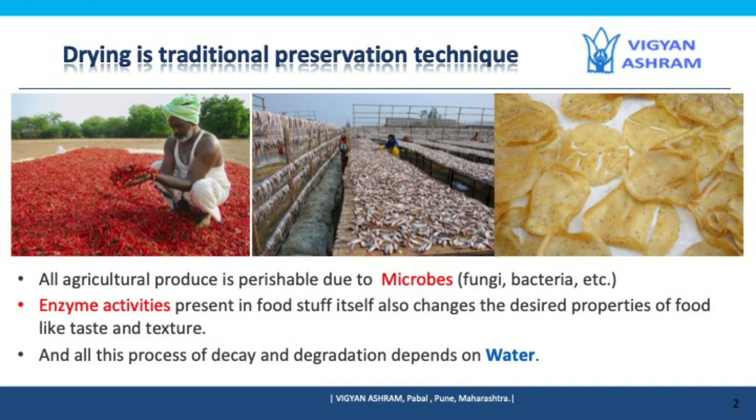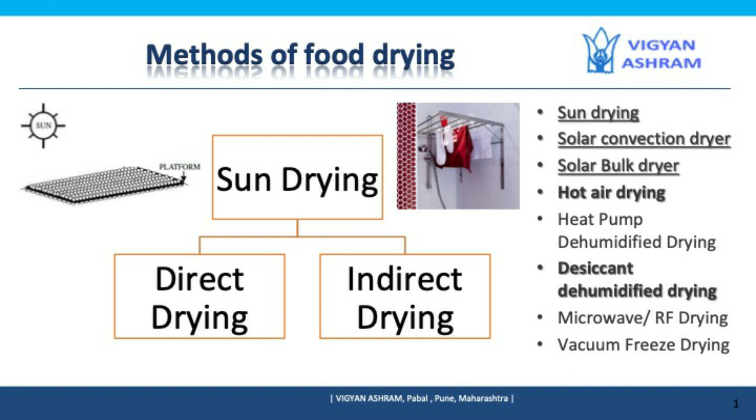And another factor that is again a property of air that we all know is relative humidity. Relative humidity is the capacity of air to take up the water. If the air is humid, it will not take up any water. If the air is pretty much dry, it will take up the water from the product and dry our product. Now these are the factors that are affecting drying process as an evaporation process.

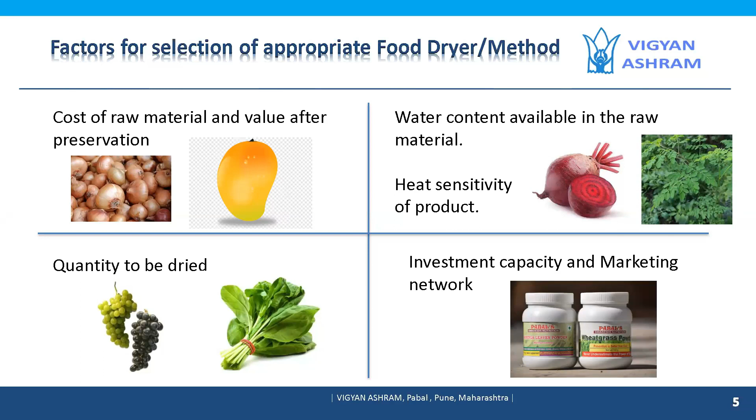So basically, dryers can be classified on the basis of energy that is used, that is, whether solar energy, electrical energy or other biomass fuel is used inside them. Another category is on the basis of mode of operation. There are batch type dryers: you just load the machine and it will continuously process one batch and finish the process, and then you have to load another batch.

And another one is the continuous system, like a type of conveyor belt where you can feed the material from one end and continuously get dry material from the other end. Further, there are some non-conventional methods. The above are the industrial and conventional methods. Non-conventional methods are microwave drying, freeze drying, dehumidifiers, and vacuum drying. All these are non-conventional because these are new technologies, very high in cost, and used in a small amount in the industry.

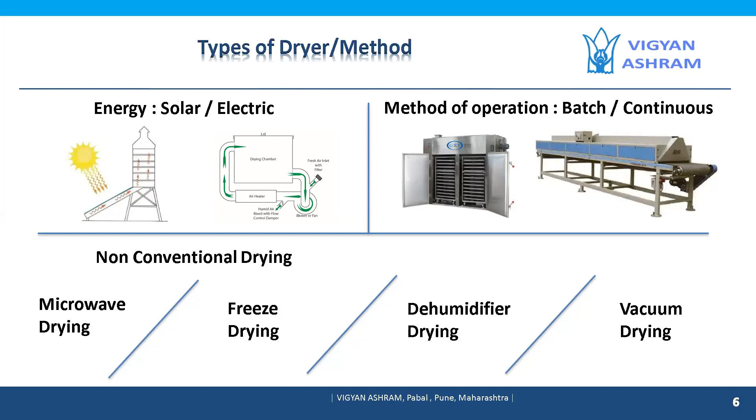Like there is dust present in the air, there are pollution particles present in the air. Also there are some contaminants like germs which can settle on your food product during the process of sun drying. It is very easy to do it: you spread a sheet, spread the product on it, and it will dry when exposed to the sun. Also it is very time-bound, like you can dry things only during the daytime. There is no control over the process.

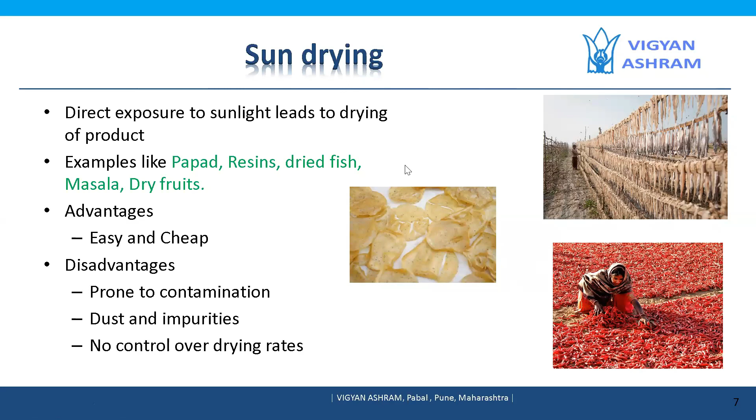Solar dryer is an indirect method of drying, where the product is not directly exposed to solar energy.

In physics, when air gets hot it moves upwards. So all the hot air moves upwards, and at the outlet there are trays in which we keep our products. This hot air passes through the products, takes away the moisture, and is discharged out. This is how the drying process works.

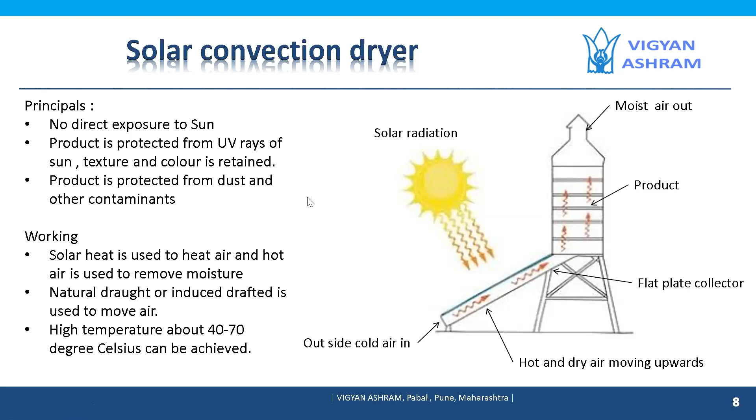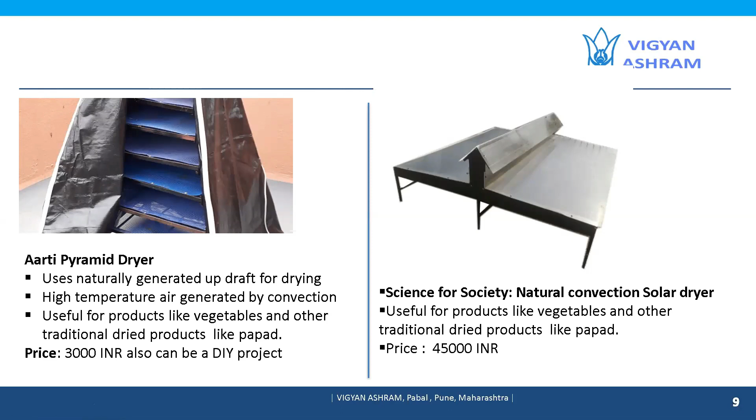It is also a natural convection dryer. The cost is mentioned in the slide at 45,000 INR, with a capacity of almost 5 to 20 kgs. Okay, now tell us about other available dryers, the BRC and the Seed dryer.

Different organizations have developed dryers. BRC has developed a cabinet dryer that uses forced convection, with fans for air movement, and a box inside which trays are kept with the food located on them. It is a low to moderate cost dryer, specifically designed for processed food and vegetables, costing up to 25,000 INR.

Furthermore, Seed Hyderabad has developed and is selling dryers in the market, called SDM 100, with a series of SDM models having an initial investment of 6 lakhs to 15 lakhs. It is suitable for vegetables and domestic goods, meant for bulk quantity, and again a forced convection dryer using fans for airflow and solar energy for heating.

In Seed dryers you can dry more than 50 kg and above, in bulk quantity like 50 kg, 100 kg, 500 kg. So they are commercial kind of dryers, and you can make very good mango bars using this kind of bulk quantity dryer.

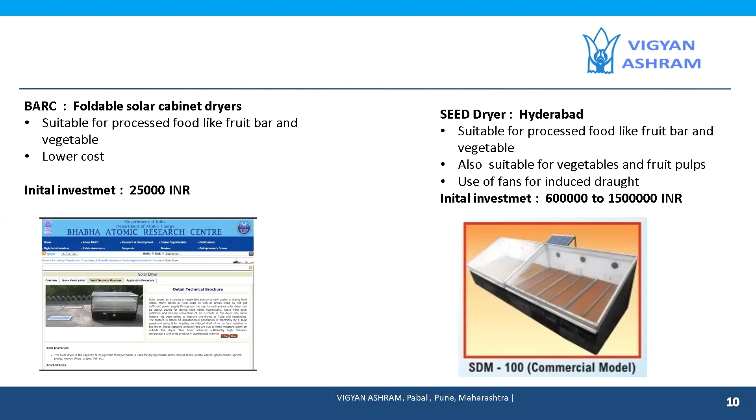Tunnel dryer is the very classic type of dryer where you erect a polyhouse-like structure, but it is closed, and there are fans which exhaust hot air. Due to the polythene paper, all the heat stays inside, and the product is not exposed to outside air. The inside temperature rises, and the exhaust air is driven out by the fan. This is for large quantity drying, like fruits and masalas.

In South India, there are many tunnel dryers used for drying masalas like turmeric, chili, and black pepper, kind of very essential oil stuff. It is used for very bulk quantities, like 100 kgs, 200 kgs of product at one time.

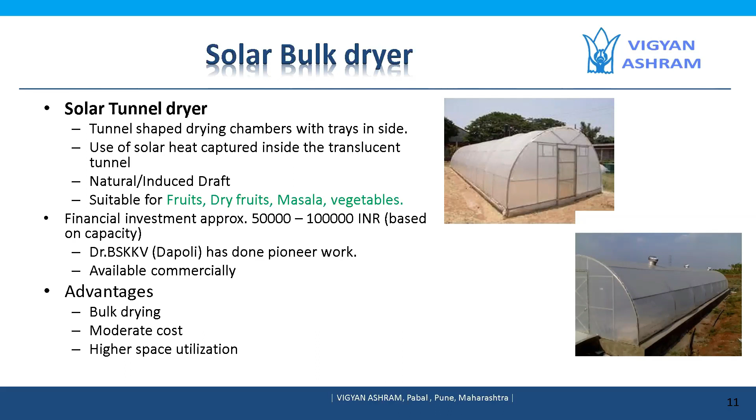Okay, very good, Shubham, now next question. Actually I haven't introduced the participant properly. Shubham is the one who made the dome dryer at Vigyan Ashram. So Shubham, tell us about your dryer, how you designed it, and what are the features of the dryer.

I am a student from Design Innovation Center at Vigyan Ashram, and this was my project for 3 years. The major aim was to increase the bulk capacity of the dryer and also reduce the cost, so it should be affordable for rural farmers to invest in the drying process.

So basically we optimized the shape of the dryer. We studied all possible shapes like dome, prism, cube, and we zeroed down on the dome because it has the highest surface area - minimum surface area for given volume, and for given surface it has the highest volume. The basic problem in solar dryers, cabinet dryers, or solar bulk dryers was sun tracking.

As the day passes, the sun moves, and the heat capture was reduced with the angle of the sun. But the dome shape helps us capture sunlight from all directions, irrespective of position.

Inside there are trays on which the product is kept, as you can see in the image. Then the dome is kept on the product as a lid, and there is a fan on top of the dome powered by solar panels, which draws hot air outside. The principle is the same, we have just optimized the shape to increase the capacity of the dryer.

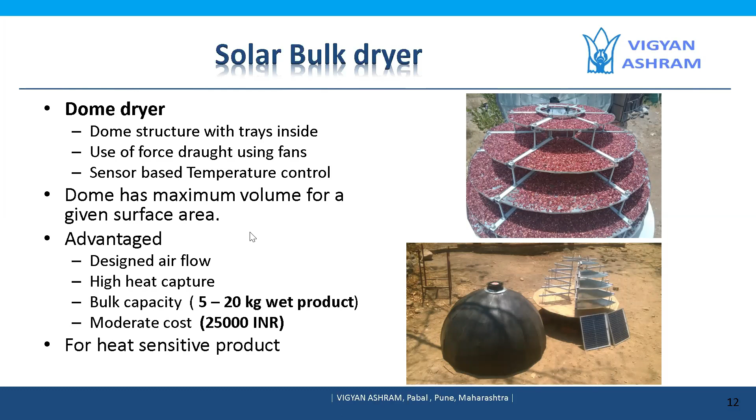Now I want to introduce you to my other colleague, Pramod. Pramod, are you there? Pramod? Yes sir, I think - okay, had some connectivity issue. Okay good.

So Ranjit, tell me about what kind of products Pramod makes. Hi everyone, this is Ranjit, and I know Pramod Pansare from the last 8 years. He is our incubatee at Vigyan Ashram, and Pramod runs his food processing business called Srinath Food Products at Pabal, and he has pioneered some very innovative products.

He makes moringa powder fortified chikki, biscuits, he also sells moringa powder, and he has got some interesting ready mixes, like puran mix. Puran poli is quite famous in Maharashtra, and making the puran stuffing for the roti is a kind of tedious process, so Pramod has pioneered a puran mix, ready mix powder.

Pramod has his processing unit at Pabal, and he's using solar drying in combination with an electrical cabinet dryer. I think his investment is around 5 lakh rupees, sir.

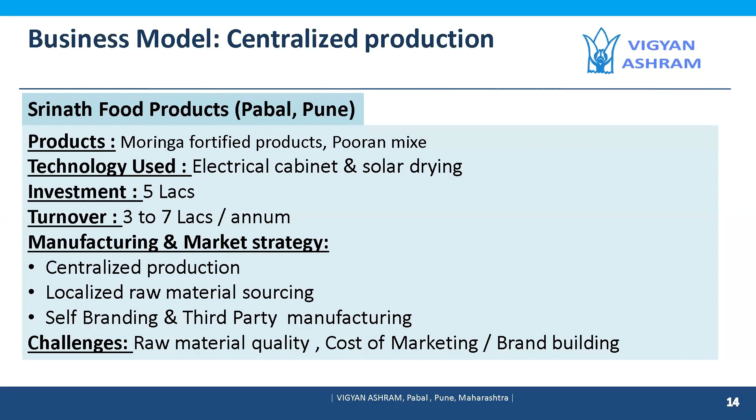As Shubham said, it doesn't affect quality on a large scale with a solar dryer. But for drying puran or any ready mixes of cooked food, puran is semi-cooked food where you need continuous heat and a continuous drying process, so you go for electrical cabinet drying.

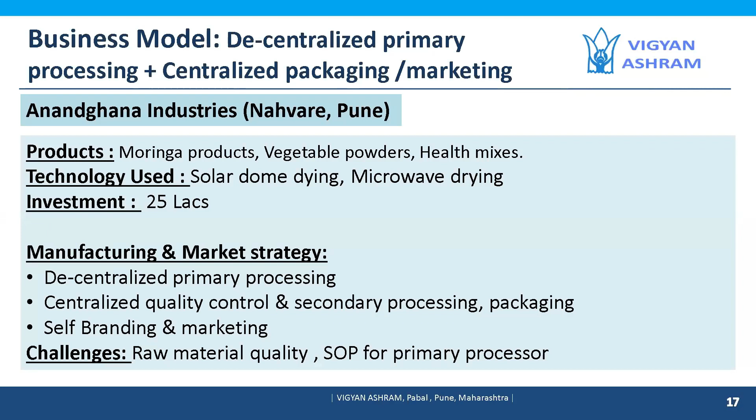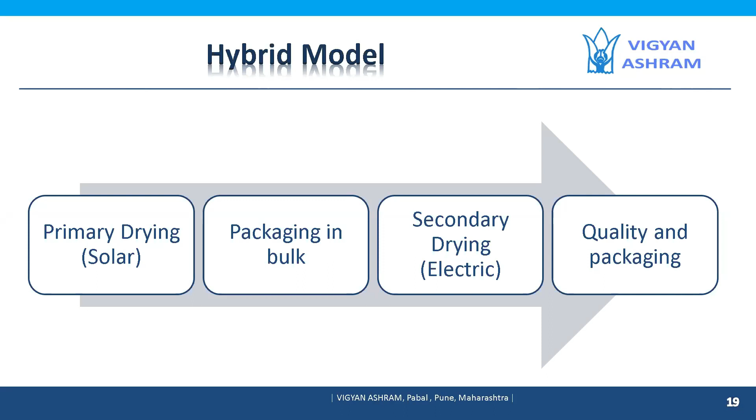So I just want to again go back to Shubham. Can you unmute Shubham? Shubham, are you there? Just unmute Shubham. Yeah. Shubham, please unmute yourself.

Shubham, I want to know from you about the other kinds of electric dryers which Mr. Kadam was talking about, and which Srinath Pramod Pansare is also using for drying his Puran mix. Can you tell us about the different types of electrical dryers? Basically, Kadam sir described a hybrid model. In the process of drying, there are 2 or 3 stages of moisture. First is the surface moisture, which is very high in quantity. Another is the moderate moisture, which is deeper inside, and the third stage is the core moisture. You can also categorize it in 2 steps, core moisture and surface moisture.

In the initial phase of the drying process, lots of moisture is removed, and that consumes a lot of energy. This cost of energy is very high, and here solar drying is very affordable because energy is available cheaply, and the moisture removal rate can be uncontrollable, and in the first stage we can reduce the moisture in primary drying or pre-drying up to 20% to 30%.

Now the second stage, the secondary drying, can be done with advanced and non-conventional processes like electrical heating dryers, dehumidified dryers, microwave dryers, or vacuum freeze dryers. When the moisture content in the product is already less, you can use less energy to remove it with non-conventional methods, which reduces the total cost of the process.

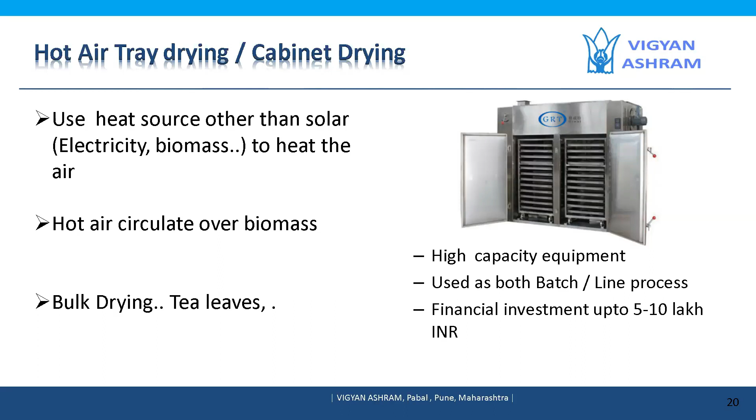You mentioned that. Heat pump dryer is a modern technique where dry air is used, and dry air is generated with the help of a refrigeration circuit. If you know, there is a condenser and there is an evaporator, and when the air is chilled at 4 degrees Celsius, it loses all its water. The water inside gets condensed and drops out.

Now this dry air is again heated up with the help of the condenser, which is high in temperature, and this dry air is passed through the drying chamber, and the further moisture removal is done by the dryer. In this process, temperature control is highly available, and it is suitable for heat sensitive products like fragrant leaves, tea leaves, and other products where you also want to retain color.

And it is also very low. The initial capital investment is very high, but the operating cost of this method is very low.

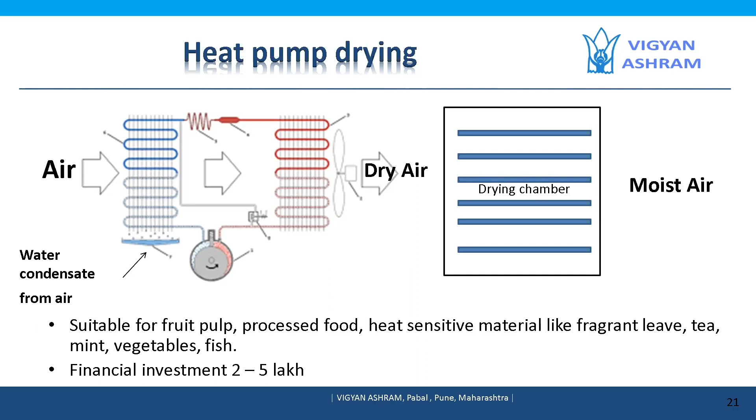So Shubham, tell us about who are the manufacturers, where are they, what is the cost of the heat pump dryer? Like I've mentioned in the presentation, there is an industry in Pune, Pimpri Chinchwad area, called Agroripe Private Limited who manufacture these dryers. These are specifically manufactured for fish and fruit bars. Again, Vigyan Ashram Pabal is also into manufacturing of heat pump dryers, and the initial investment cost is starting from 2.5 lakhs, and depending on your capacity, it will increase.

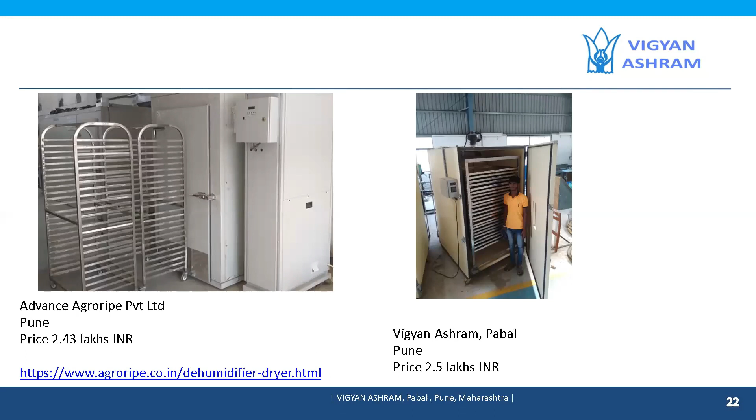Okay, good. So we saw the cabinet convection dryers, electric dryers, where only hot air is passed through, and biomass. And we discussed this heat pump dryer. Now, Shubham, tell us about this desiccant based food drying. What is this? Desiccant based. Desiccant based food drying is also something that I worked on.

It is a very new and rare kind, where desiccants like silica gel or deliquescents like calcium chloride, silica gel, molecular sieves are used to dry the air. When the air passes through silica gel or molecular sieve, all the moisture gets trapped inside it, and whatever we get outside is dry air. Same process. The dry air is then supplied to the drying chamber and takes away moisture. This process is also suitable for low temperature drying and for heat sensitive products.

Okay. So basically in the heat pump dryer you use a refrigerator to remove the extra moisture in the air. In the desiccant based dryer, you use a desiccant like silica gel or calcium chloride to absorb the moisture, and the drier air we can send ahead, heat it, and use it in the drying chamber. Drying chamber, yes. Okay.

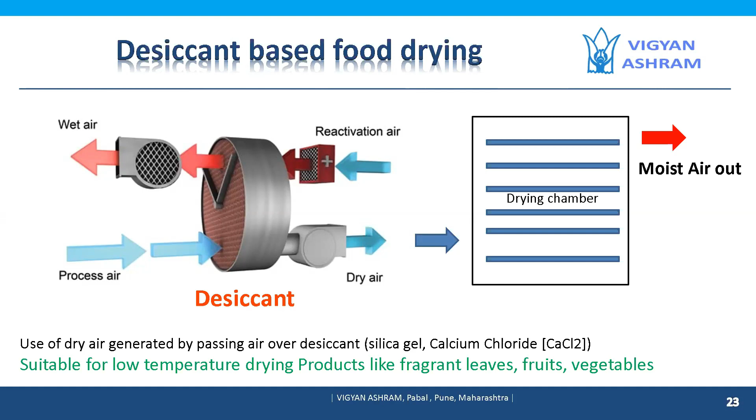Now Shubham, next, what is this about vacuum freeze drying? We've heard this name too, tell us about it. This is also a very industrial process. It has been a very well established process. The only drawback is very high initial investment cost and very high running cost.

It is the foolproof system of drying, because you can retain the maximum amount of vital nutrients, because you actually dry the product at -40 degrees Celsius, -20 degrees Celsius, where the food product is chilled and the water inside is frozen, and then it is subjected to vacuum, where the water directly sublimes, from ice directly to steam.

In this process, the essential oils, vitamins, colors and textures are very much retained because the water is evaporating at very low temperature, and the food is not subjected to any kind of heat.

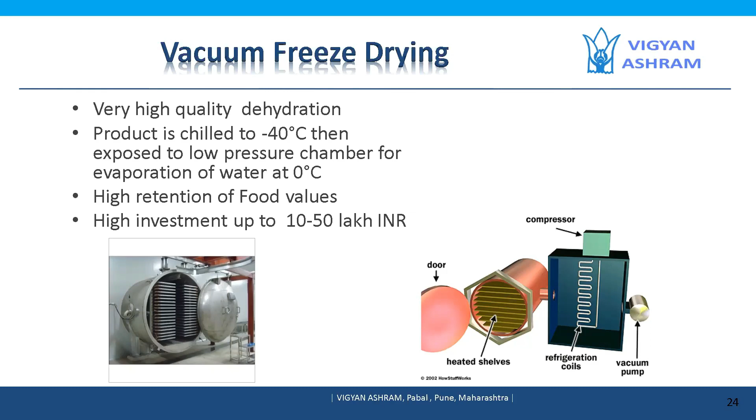Microwave dryer is also a very modern technique. Now everybody has a microwave oven, but the principle is that in a microwave only the water inside the product is heated and nothing else. कुछ और heat नहीं होता microwave के अंदर, because the microwave energy can only see water molecules. It cannot see anything else, and it goes and hits the water molecule and heats it up. Now the application of this in drying is a small amount of microwave energy. If it is supplied in a specific pattern on a substrate, it can evaporate water, and all the other stuff like vitamins, natural oils, colors can be retained in itself.

Now the advantage of this process is that it can be done at room temperature also, like any temperature it can be done depending on. So you have very high process capacity. Also the operating cost of only microwave drying is very less compared to freeze drying and other drying, because the energy that you use is only for evaporation of water, and the wastage is very less. Okay. So you are only breaking that molecule. You are not completely heating or drying that product, basically. Yes. Treating that product. Okay. Yes.